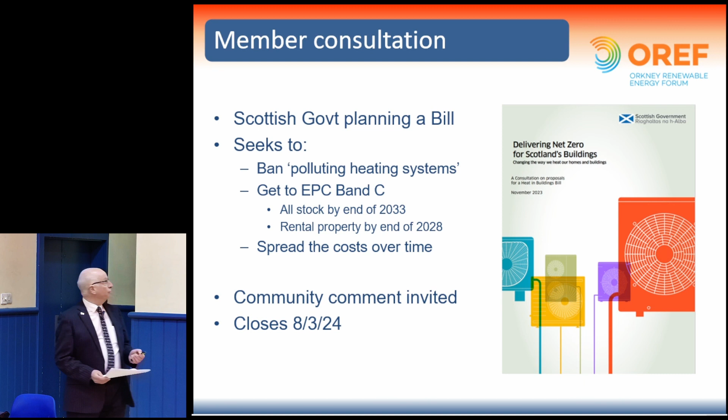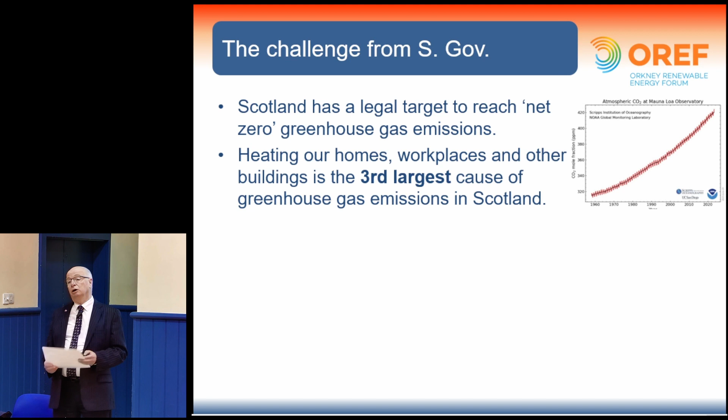Why is it happening? Well, we know we've got some significant climate change problems. That graph in the top right-hand corner is basically the CO2 levels in the atmosphere over my lifetime. When I was born, we had 317 parts per million CO2. We're now at 422 parts, as I looked up this morning. So we definitely have a carbon dioxide problem. And heating our homes is actually the third largest contributor to emissions in Scotland. The intention is to make sure that gas and oil systems are not used for heating and hot water.

The consultation says change is going to be needed for something like 89% of domestic properties and nearly half of non-domestic properties, and about half of houses are presently worse than EPC Energy Performance Certificate grade C. However, if you look at the graphics in the report, it shows how they believe properties are heated, because this is Scotland as a whole, and the green three-quarters of the circle is mains gas. So clearly we are not typical of what they're expecting.

I would suggest that we're not in a position where the scale of change being talked about here is actually what we need, because a lot of houses have already made the change to non-polluting energy systems, electric heating in various forms, and new housing is pretty much electric. So I think this is less of a contentious issue for us, and I imagine it will be for a number of other communities too. But in some areas, particularly urban areas, this will be the scale of change they're talking about. I don't think that's us entirely.

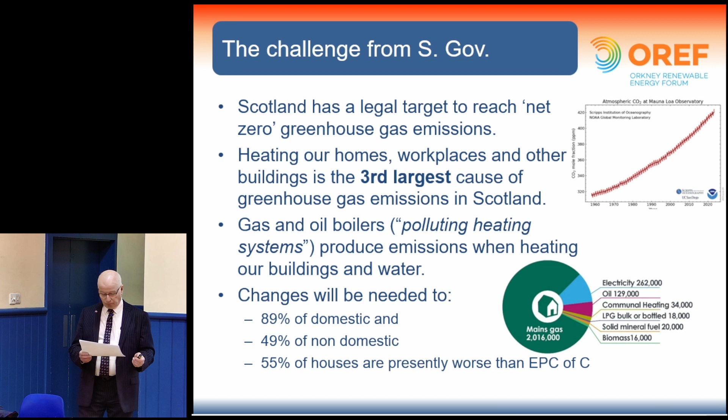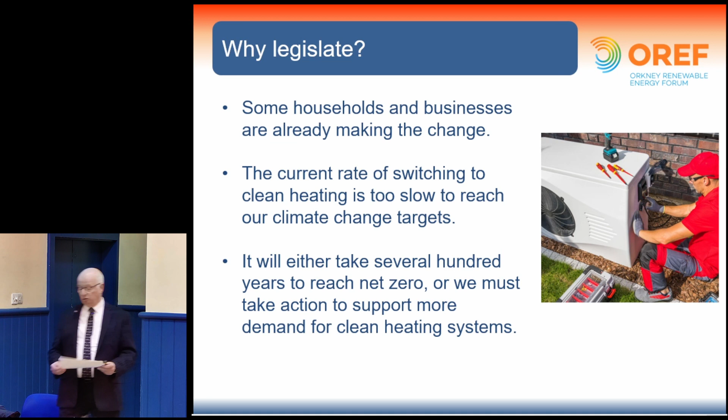So why are they actually having to legislate? Well, some properties and businesses are already making the change, but the current rate of switching to electric heating is far too slow. If we carry on at the present rate, it's going to take several hundred years to reach a point where we've made sufficient change to have an impact. So they recognise there needs to be some action taken to drive change.

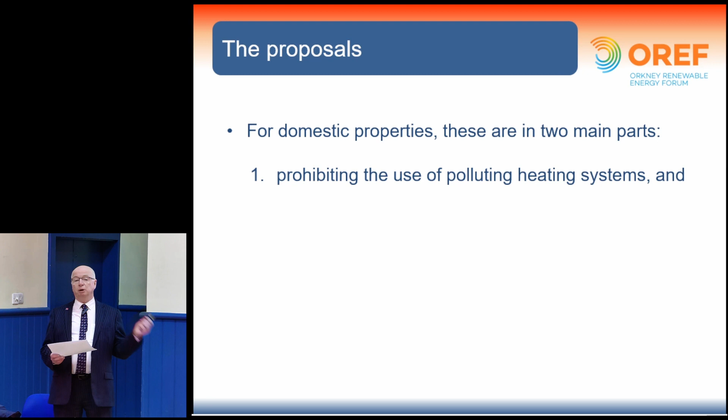So the proposals are in two main parts: firstly, the prohibiting of polluting heating systems, and secondly, making sure homes meet a reasonable minimum energy efficiency standard. Now, there's a bit that comes in later - if you've already got a non-polluting heating system, you don't have to worry too much about the energy performance side of things. So if you've already got a green heating system, they're not pushing you towards improving your house.

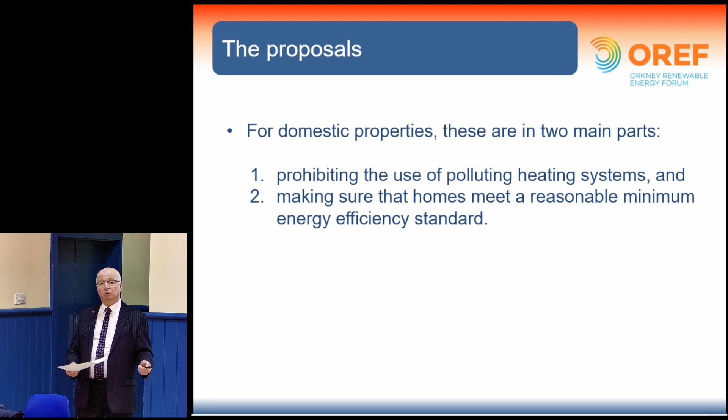Now, clearly there's an incentive to do so - you're stupidly throwing money away otherwise. But the point is there are some cutouts in some of this.

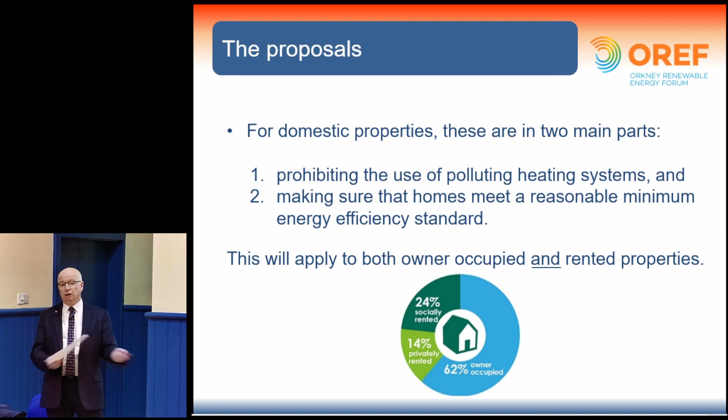This will apply to both owner-occupied and rented properties. At the bottom, the graph shows the scale of what's going on in terms of privately rented and social rented - between them, 38% of housing stock. One issue I can see coming is that those are often the properties where people are at greatest risk of fuel poverty. So quite sensibly, they're targeting the rental sector to get its act together sooner than private ownership properties. That's an unusual balance, but it seems to make sense to me.

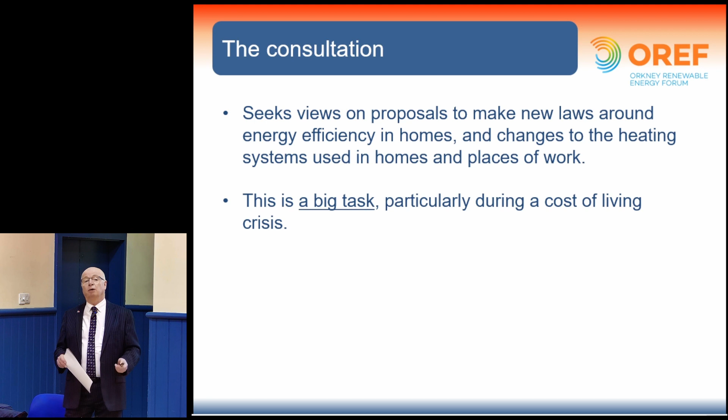So this consultation is seeking views on how to make new laws about energy efficiency and these changes. They recognise this is a big ask, particularly at a time of financial strictures - this is a difficult time to do it. The proposals are designed to have a just transition, so it's affordable, fair and feasible. There are several bits in the documentation which show a degree of compassion about what they're trying to achieve.

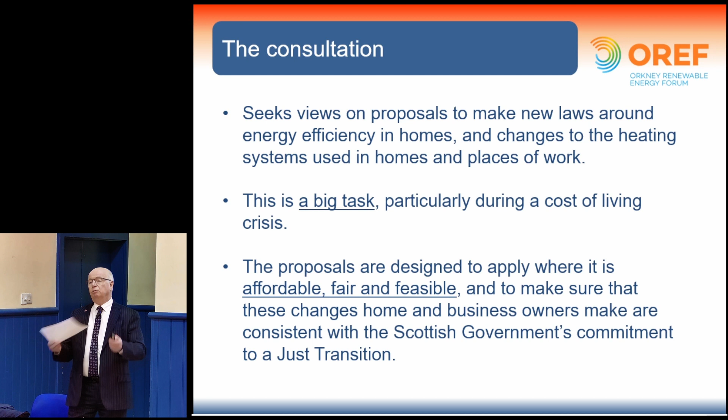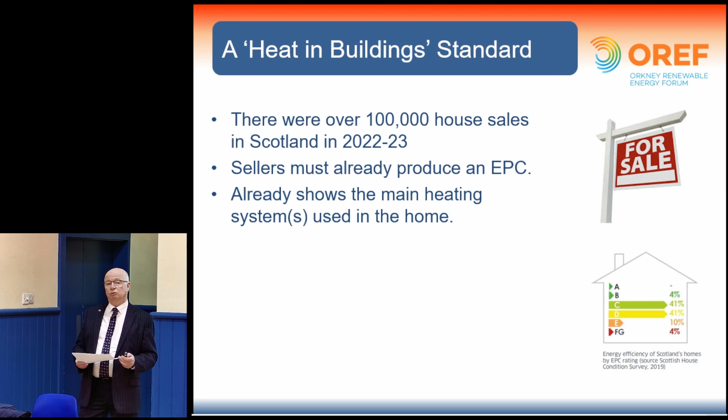Looking at the heat side of things, one way this can be implemented relates to the fact there were over 100,000 house sales in Scotland last year. At the point of sale, you already have to produce an energy performance certificate, so there's a mechanism by which people have to declare the state of their house before selling it on, and that already shows the main heating system in the home. The idea is that prospective buyers can see what they're buying into, and one argument is this would allow buyers to haggle over the price and make sure they know what they're buying into.

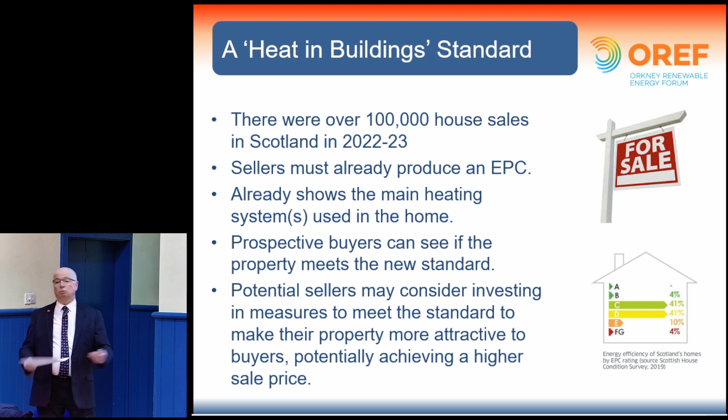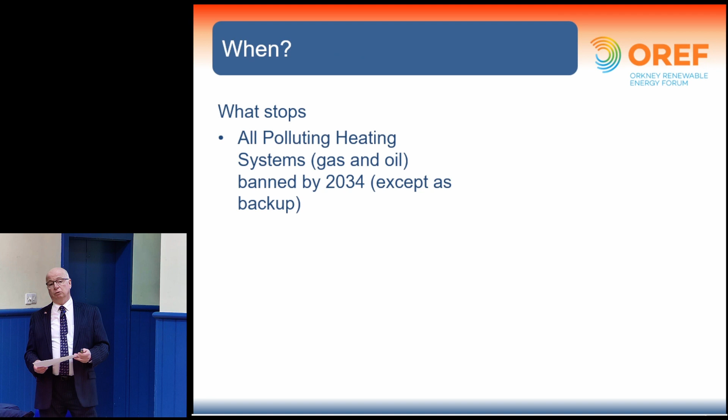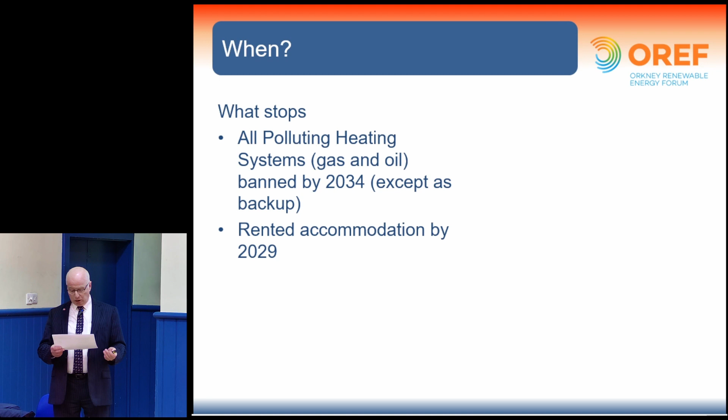It may also be a trigger for sellers to want to get the house up to standard before they sell it - one way or the other, there's going to be some pushing and shoving on that interface. But what's actually going to happen, and what's going to stop, is the use of polluting heating systems - that's got to stop in rented accommodation by 2029. It actually says end of 2028, but I'll say 29 as it's easier. Rented accommodation has to be done 5 years earlier.

Once again, pointing out that if you're already in rented accommodation that's on electric heating, the performance side of things, you don't have to change the energy performance necessarily.

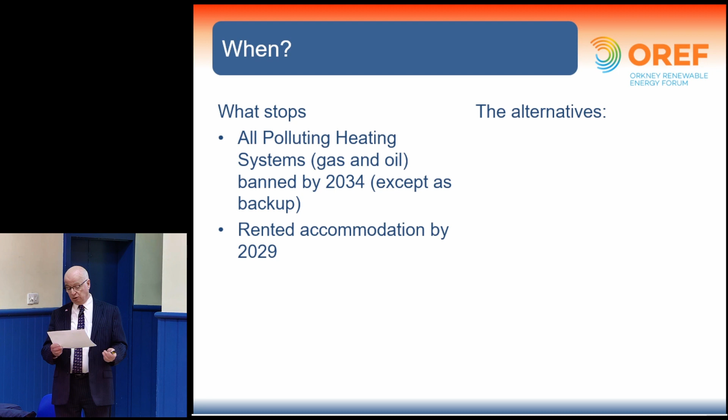So what are the alternatives to polluting heating systems? Well, they're principally the ones we're used to seeing: air source heat pumps, ground source heat pumps, district heating networks, which we are not seeing much of, and then just general electric heating in one way or another. I don't think it's a great shock to most people that that's really what most people are putting in at the moment.

So oil is fairly rare. If people have got some examples of that, see Michael here, and Alistair and Stephen, if you've got any input about what is going on, it'd be really useful to put this into the consultation in a factual state. The last time I put an oil boiler was St Magnus Cathedral, but that was a good reason why.

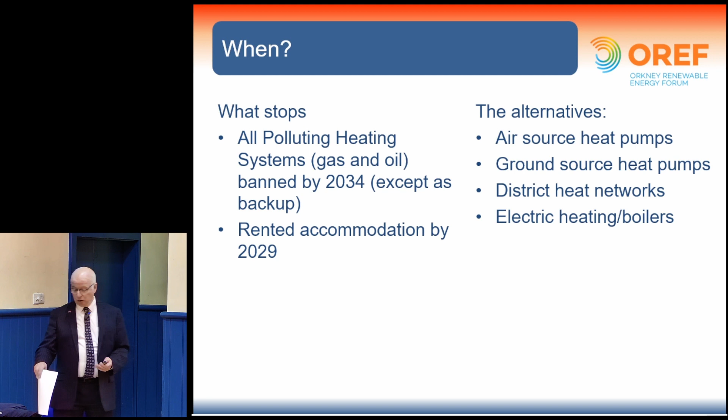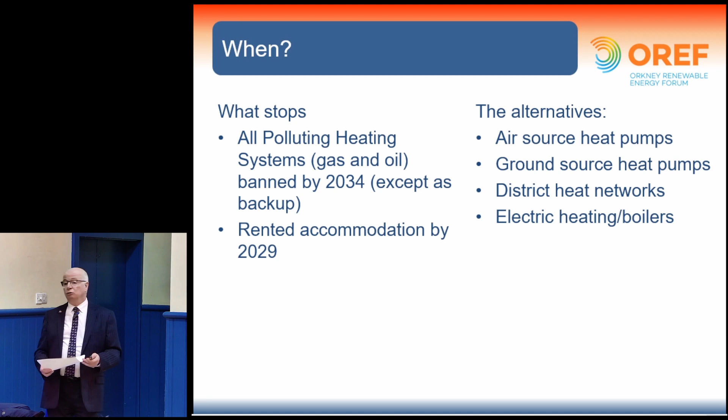The other point is that because of this 100,000 homes that change hands every year, there's also a question about if you buy a house, you will be compelled to make sure that it's either up to an energy standard or not using a particular polluting energy system within a certain period. They're asking whether people should be given 2 years grace or 5 years grace in the whole thing. So there is a point where some degree of compulsion is going to take place.

You're right there, Simon. Was that? So what have you got, Robert? Go on. Very well. Fine, so it says non-domestics by 2045, but there is a push for this in it. Okay, well, we don't. Fine. So that's what, there's some quite interesting bits of. Sorry, Simon, can we do this afterwards?

So there's some quite interesting bits of compulsion that are creeping in around the edge of this, and I think, frankly, it's necessary because we've got to get on with this, and we can't all be nice about it all the time.

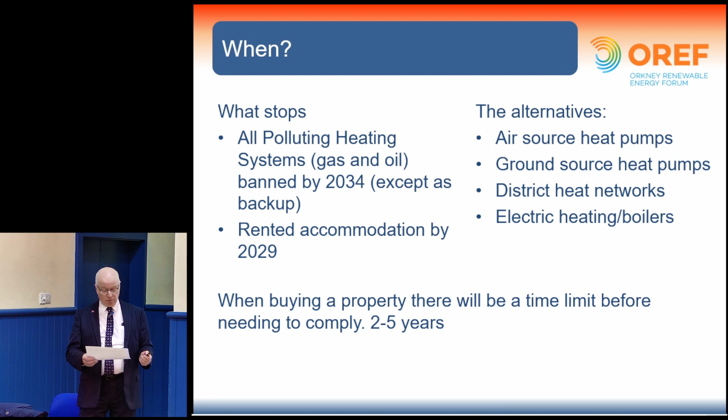So the other side of things that's also covered in the consultation is about heat networks. Now, correct me if I'm wrong, but there aren't any heat networks in Orkney at the moment, although we did try one in the past.

Okay, so there seems to be more encouragement to put in district heating and heat networks. It's something that's being increased by the Scottish Government now, and we might see that sort of thing start to become manifest. There's work going on at the moment to look at the possibilities in certain areas.

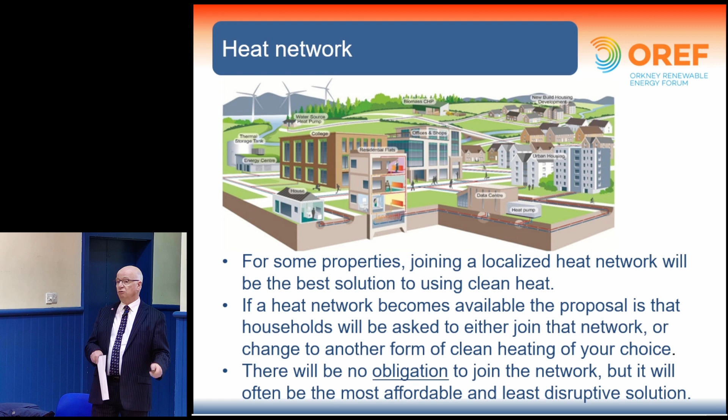And if a heat network is put in, the idea is that households will actually be asked to join that network. There'll be no compulsion to join, but if a network is put in, you'll be asked to join. If you don't join, you'll be pushed to change your heating system to a low energy system anyway. So the act of putting a heat network in will actually trigger activity: join it or change. What you won't have is the opportunity to ignore it.

I think that's a system they used in Denmark to an extent, where heat networks were put in and people were told you can join if you want, but if you don't want to join, you're going to pay for it anyway. So there was a degree of nudging and encouragement.

So I think this is quite interesting, and whether this survives drafting in the bill, we'll see. But it may not be something that's big here. There are probably opportunities, but we'll see how this goes.

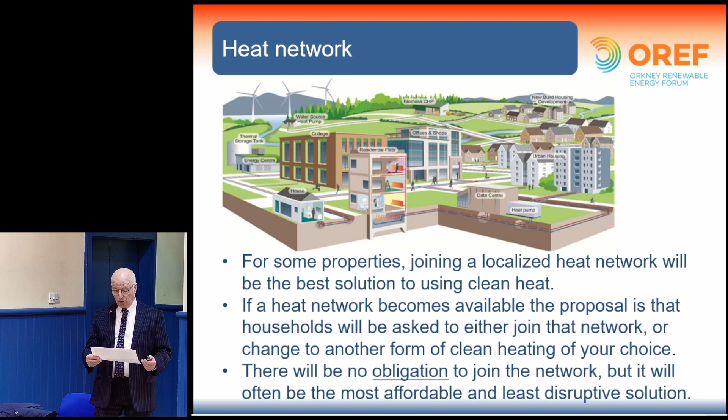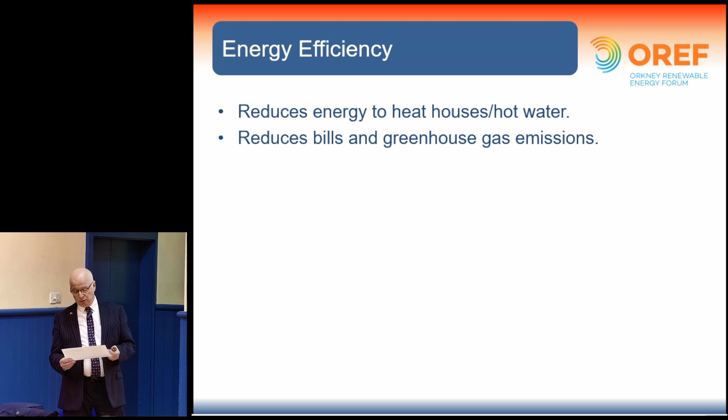Looking at the energy efficiency side of things, we know how this works. Energy efficiency reduces the heating requirements for hot water and heat, reduces bills, and reduces greenhouse emissions. It also reduces the size of heating equipment - you can have smaller heat pumps in well-insulated houses - and reduces fuel poverty. The less fuel you buy, whatever the price, the more money you've still got, and that helps the poverty aspect. So it's all in the right direction.

So OREF is firmly committed to energy efficiency and the preferential use of renewables. It's written right into the middle of our objectives, so this makes absolute sense.

The Scottish Government is asking for views on a couple of ways of making this work - how should improving energy efficiency actually be driven? They're suggesting either pushing people towards installing a list of particular measures, which is basically insulation in various forms and smart controls, or alternatively a means by which you can show your house is reaching an energy efficiency equivalent of C, which comes down to a demonstration of how much energy you use per square metre. If you can demonstrate you're at those energy consumption levels, they're deemed to be at C, in which case you may not need to do anything.

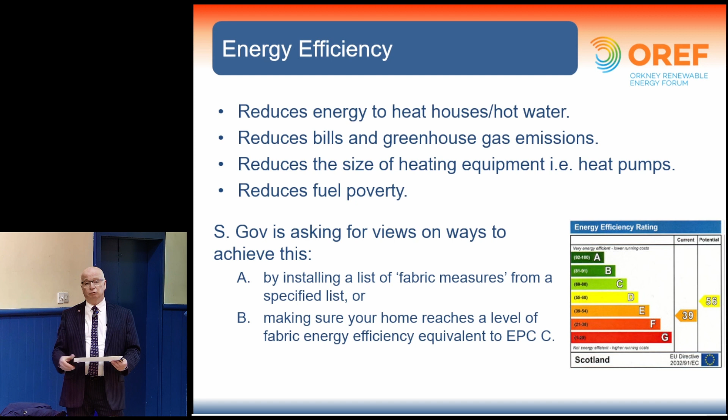Looking at those two ways of doing it - the list of measures includes loft insulation at 270 mil, that's 10 inches in old money, draft proofing, heating controls, hot water lagging, and suspended floor insulation. None of those things are exactly rocket science, and frankly most of those have a degree of practicality.

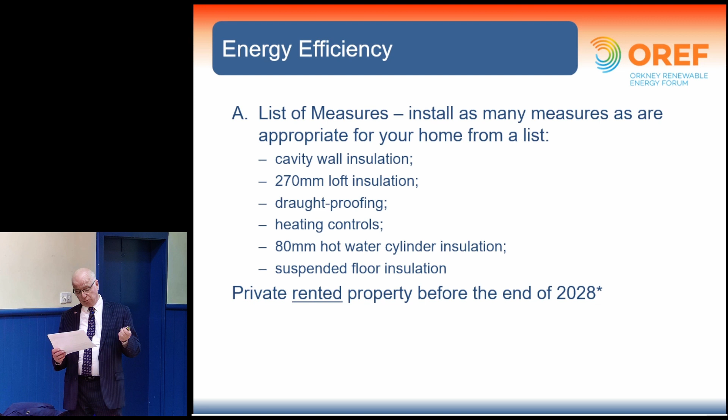The point is this will be needed in private rented property by the end of 2028, or privately owned houses by the end of 2033, unless the property is already using a non-polluting system. So if you're already using electric, then you're okay.

So the point is, once again, this is not going to be too much of a threat for a lot of what's going on in Orkney because we're already on non-polluting heating systems. However, some of those things will be a challenge in some locations, particularly wall insulation. I think we've got input and insight into the practicalities and impracticalities of some of the insulation techniques that have been used historically, and it would be useful to feed this in to say these are some of the challenges we may have.

It's also interesting that public buildings are also going to be pushed into not using polluting heating systems by 2038. So you have to take the boilers back out of St Magnus - you got 14 years of use out of there.

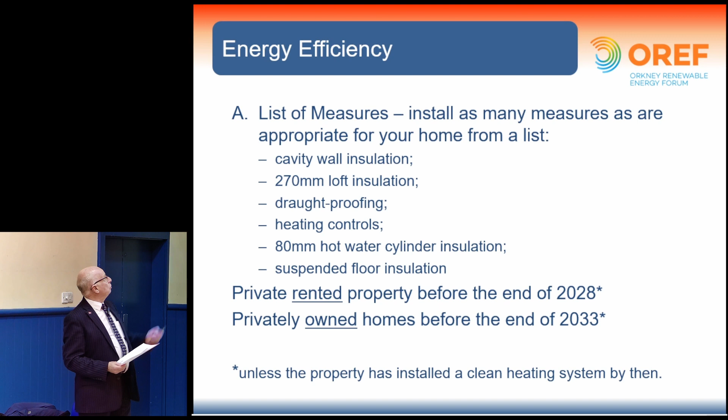Heaven forbid. I've only ever known you circumvent things for the better, so that's all right. We're good with that.

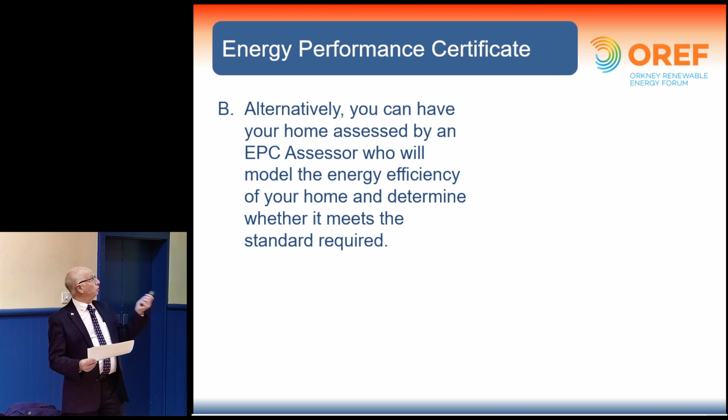So this is one of the options, and the other one was about the energy performance certificates. You will have your house assessed for an energy performance certificate if you sell it or put it on the market. I think the EPC lasts for 10 years technically, but I can't work out whether you actually have to have it assessed as an EPC, or whether you can just demonstrate it by the energy you're actually using.

I understand that you can have a demonstration. I'd suggest there are some opportunities to make inputs to the EPC side of things, because that's quite clunky, and the Scottish Government is overhauling the EPC system at the moment. There was a consultation earlier in the year which I completely missed. I'm not quite sure where the EPC certificates are heading, but there are definitely some clunky bits that could do with being improved. The government are reforming them, so we're trying to find out exactly where they've got to on that.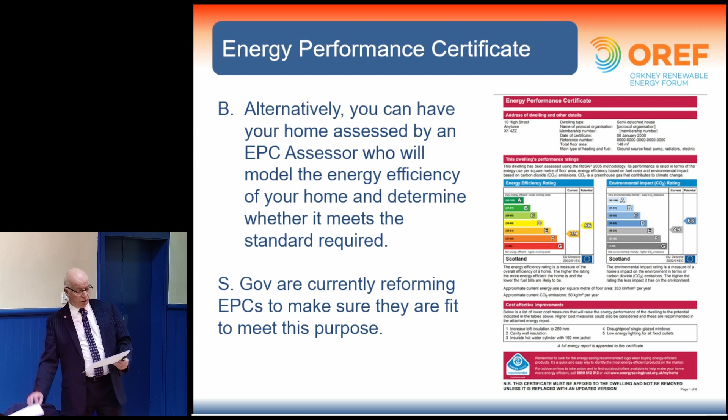The government says all the nice soft bits as well, which is interesting. They're talking about introducing flexibility in the implementation of these regulations, because, as they say, of the complexity of housing stock and individual circumstances. So it would be useful to surface Orkney's experience in that—solid walls, stone built, or whatever we've got—to show how big an issue this is.

My personal expectation is that it's not as big an issue. We can all think of stone built buildings, but actually most of us don't live in them. So I'd suggest it would be useful if we could scope some of that to show the scale of it. There are a number of people who do live in them—how representative is that, even in this community?

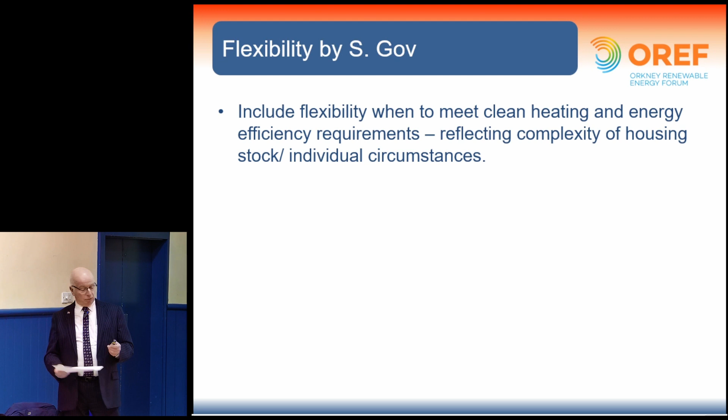They also propose giving some extra time to people, for example, where a clean heating system isn't available at present. I'm not exactly sure what they're meaning there at the moment, so we'll see—maybe some nuclear fusion in a box is coming up later, maybe you don't have to do it, maybe not. They're also giving more time if you're using bioenergy, which is interesting, but I don't think it necessarily specifies exactly what that is at the moment.

They're also considering time when complex solutions are needed, particularly with tenements and flats. One piece I'm going to suggest we put in the response is that there's a particular issue with flats and tenements under Scots property law, which is that if you're in a shared building, you jointly and severally own the fabric of the building. You can only make a change to that if all tenants consent to it.

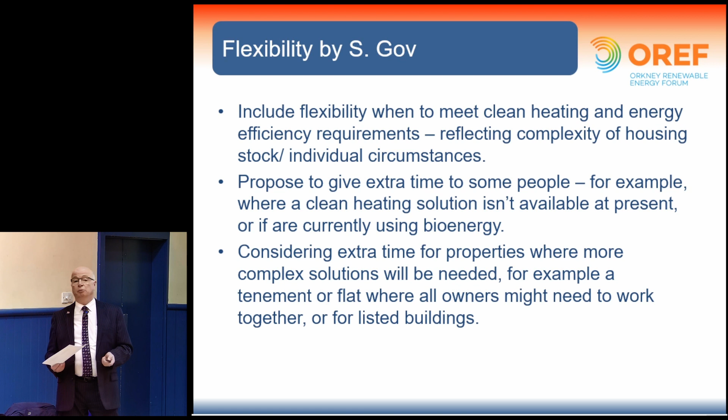So if you have a location where one of the tenants is silent on it—be it an absentee landlord or somebody who just doesn't answer their mail—technically you can't intervene in the property. It feels as though there's going to need to be some degree of democratic approach, so that if the majority say yes, we can do something, then we ought to be able to get on with it. There's probably some property law that needs a tweak, because otherwise one person will hold up the change to an entire block, which seems counterproductive.

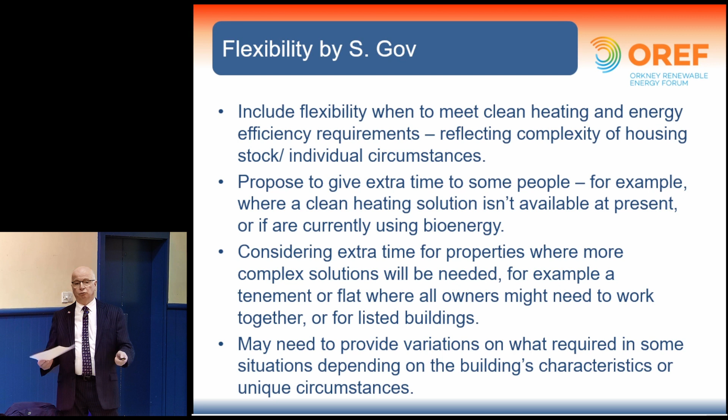They also say they're going to be flexible if there are different situations based on different building characteristics or unique circumstances. Once again, we may have something we can share from an Orkney experience, given the age of some of the property here.

The other sort of sop in the whole thing is about managing the costs—they recognise it could be expensive and are working out how they can limit the cost. There's quite a complicated process here, which I have no intention of going through because it's very complicated, but broadly speaking there are a series of ways you can have either a flat rate or a variable tariff, and a variety of other pieces. They want views on whether a cost cap is needed.

And there are different ways of calculating it. If somebody wants to write something about that, please do. It does my head in, so I wasn't going to bother. But there are a couple of fundamentals in here.

It does talk about things like, should they give first-time buyers an exemption from this? Personally, I'd suggest that's not a good idea, because first-time buyers, by definition, when we all bought our first property, we were quite stretched. And actually, burning a lot of fuel because you're living in a cold, leaky house is not a great idea. It might be better to capitalise those costs of altering the house and spread that out on the mortgage over time, and have the benefits from the heating improvements at the start, rather than exempting them and having young people living in cold, freezing houses.

Surely we've got to get on top of this. So I'm not convinced the first-time buyer exemption makes sense, but we need a mechanism by which they can afford to stay in the property. Some deferral of cost might be a better way of dealing with that.

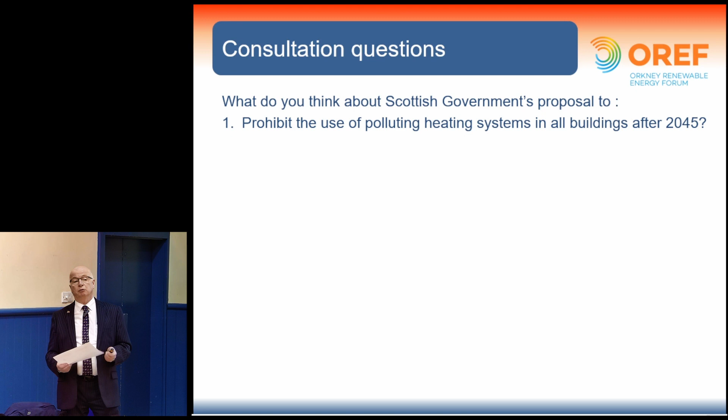So onto the consultation questions themselves - there are, I think, five of them. They want to know what people think of the idea to prohibit polluting heating systems in all buildings after 2045. They want to understand what we think about introducing a minimum efficiency standard to be met in owner occupied houses by the end of 2033.

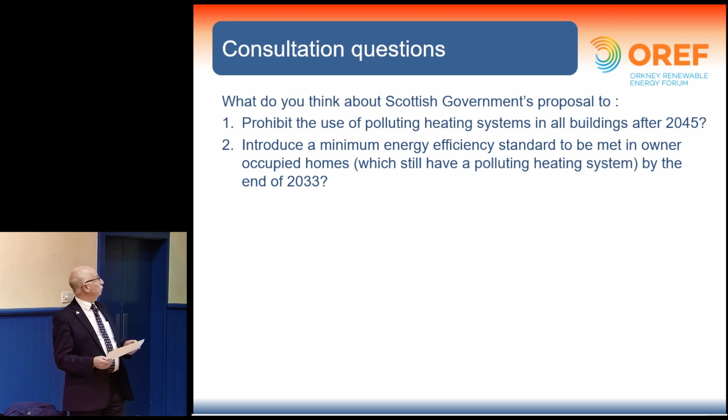And introduce the minimum by 2028, and require change following the sale of a property, which I think is quite contentious. And then finally, requiring buildings within a heat network zone to actually join the zone, or be triggered into action if the zone is created one way or another.

I find there's a lot of catch-all about, do you have questions about the proposals and all the rest of it?

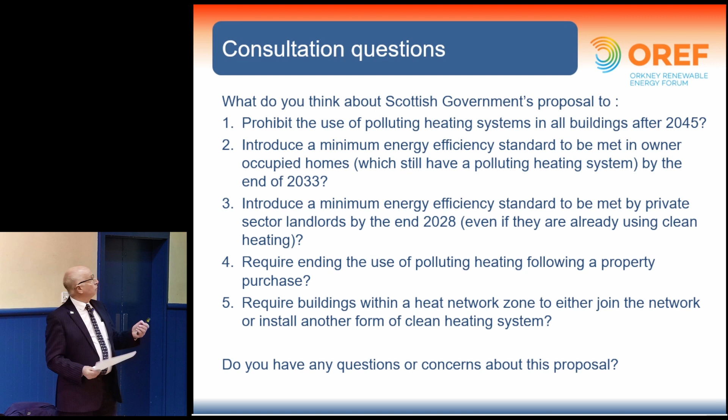So what I've got is a couple of slides to finish off, which is really about the position that's suggesting OREF is going to take in general. If I push the right button? Yes, general position.

It was supportive of the intent to reduce fuel, because of the reduction in CO2 and the ability to influence fuel poverty by reducing the requirement for fuel. That seems to entirely fit with what OREF does on a routine basis, and that seems to be a good idea.

But I think it's reasonable to say we've got some concern about the application in Orkney, and the difference that Orkney will have compared with the central belt - like no gas, and the preponderance of solid build and stuff like that. Other people have their own different issues, so we're not big on tenements for argument's sake.

I think we'll be saying that pace is needed. So I think the aggressive timetables make sense, because we've got to get on with this. If we don't get on with this, it's going to bloody kill us. So getting on with this is important. And although it's a pain, the alternative is worse.

And the idea that if a heat network is created, nudging people towards it is going to be important. That's a behavioural change - if we were Danish, we'd be used to having a heat network. Because we're Scottish, we think it's a bit unusual. So we need to recognise there's a cultural change that's best affected by a bit of a nudge.

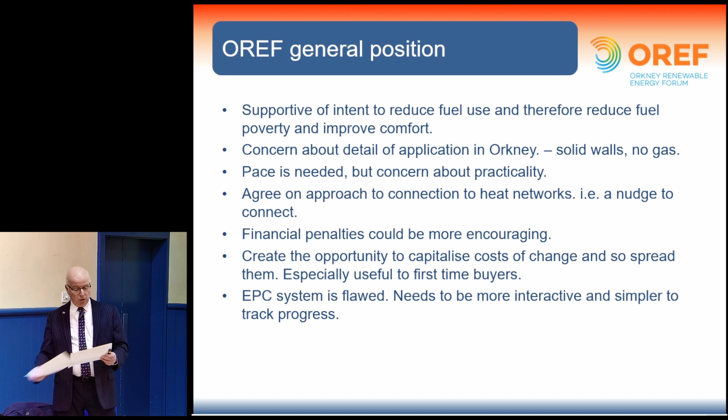A couple of other specific points we're going to make. One, the point about flats. Flats will be hard to deal with if legislation is left as it is about the ownership of the outside of the property.

Interestingly, it sort of excludes retail, and it doesn't set energy performance standards for retail. I'd suggest this is a good opportunity for us to put the boot in about the fact that it doesn't seem a lot of sense when you walk down the high street, you get assaulted by gales of hot air coming out of shops when they can't be bothered to shut the door. So frankly, something about changing some retail behaviours, which is if the heating's on, the door's shut. If you can't work out how a door goes, I'm not sure you're going to manage the chip and pin.

So anyway, a bit about public sector buildings are going to be driven faster than housing, which I think makes sense because they're a good way of making it work, but I think we need to be careful about the definition of public sector buildings to make sure there isn't evasion.

I don't know why I keep looking at Alistair when I say evasion. That's not fair, is it?

Also, I'd suggest that we're going to need to make sure that all parts of the public sector are on board with this, because there are changes coming within the planning space, and some of these changes will need building regulation control, and we've got to make sure that that's as streamlined as possible. I'm certainly hearing some stories about it not being as streamlined as possible, and it feels as though there are some improvements needed. So we need to make sure the whole system is groomed so that things can go through it quickly and as smoothly and as frictionlessly as possible.

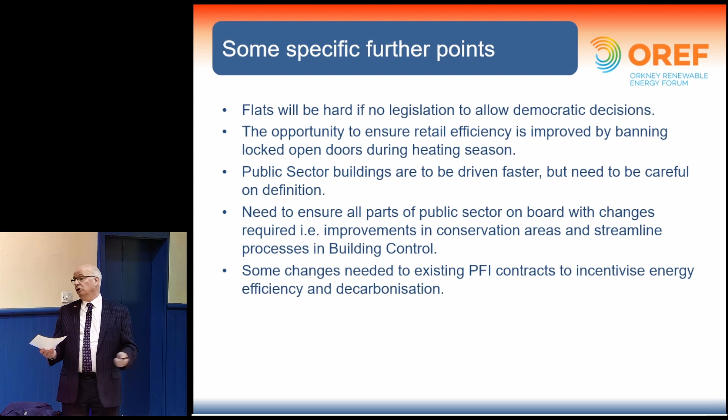So that's where we are. That's what I know. Simon has read a lot, you've been doing your homework well, and Simon, glad you're here, mate. So it really is a case of chucking it open to the floor if there are particular points that...